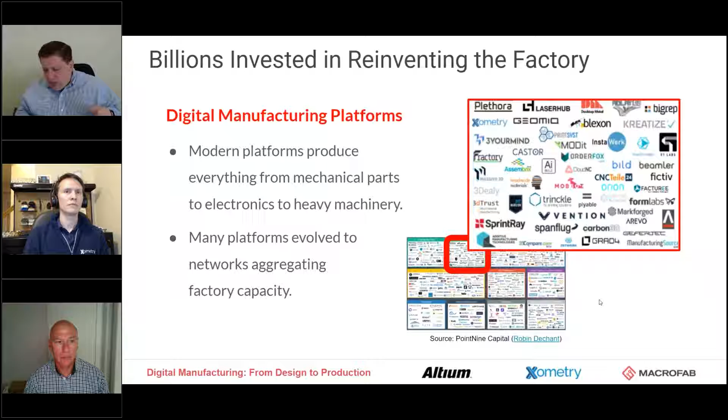So the question naturally arises, what problem are we even solving? In fact, traditional manufacturing was tremendous for a number of years, especially for contract manufacturing. It really grew up in the 90s, right as the internet was starting to scale up. Contract manufacturing was all the rage.

Believe it or not, only a third of all electronics manufacturing is still done through outside companies. There's a lot of businesses still that own a lot of their own manufacturing facilities. But for the most part, the cloud model and ability to do agile and iterative development really passed up a lot of the traditional manufacturing environments in this space.

So what we see is a lot of waterfall development, slow design iteration. It takes months or years to launch a product. Electronics design to product cycles could be 2 years. In the automotive world, it could be 4 years. The shortest we've seen is about 1 year, but it takes a lot of agility to get that done.

For years, supply chain has been optimizing purely for cost. So we're seeing crazy situations now where it's so perfectly competitive, almost anti-competitive, that there's 2 factories producing a component, and if one of them has a fire, there's a global shortage. This is affecting every aspect of supply chain. It's not just COVID, there's a lot of reasons why supply chain is brittle now.

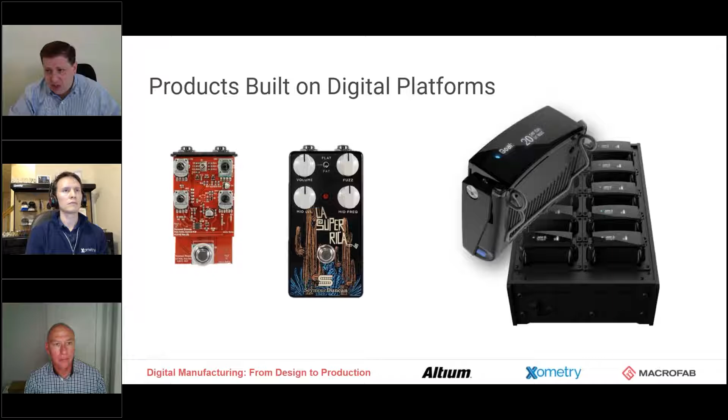One of the most common questions we get from people is when we talk about digital platforms, what kind of scale are we talking about? Because the service where you just upload a design and get some number of mechanical parts produced or some number of PCBs produced, fully assembled, turnkey, that's been around for a while, but we're seeing digital platforms go well beyond that.

Obviously, the craziest example I gave you is being able to buy heavy machinery. But in an electronics world, we are seeing customers move sometimes their entire production environment onto a digital platform. Sometimes it's a portion of it, and that's one of the ways they introduce resiliency into the picture. They might be spending $15-20 million on manufacturing a year, and they'll move $5 million to a digital manufacturing platform.

So we're seeing customers use this from volumes anywhere from low volume prototypes up to 10 units, to low volume production, this is where we see a lot of EVT and DVT builds, and ultimately go to production where we're producing thousands of units, hundreds of thousands of units. So this is an evolving use case for digital platforms.

It does not displace the well-known names in the market out there. So if you work with Sanmina, Flex, Jabil, especially Foxconn, the electronics manufacturing market is over $500 billion. Foxconn is like 1/5 of that by themselves. So there's not a situation where Apple's going to use digital platforms to go build iPhones. They're going to be built by Wistron and Foxconn and Pegatron.

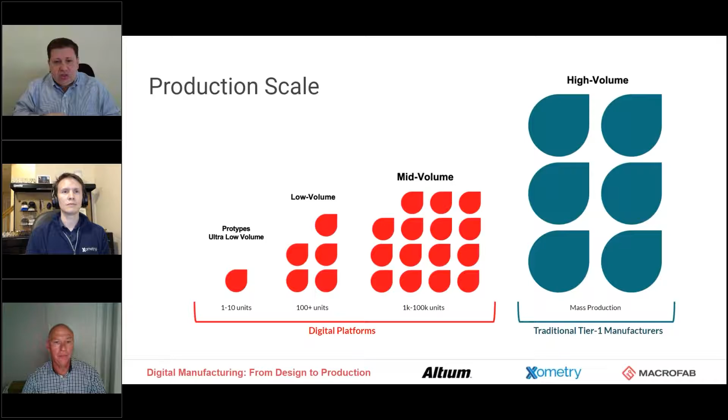At this point, I want to hand it over to Ted because we wanted to take you through the entire production process, all the way from the design stage to production. And that starts with design software.

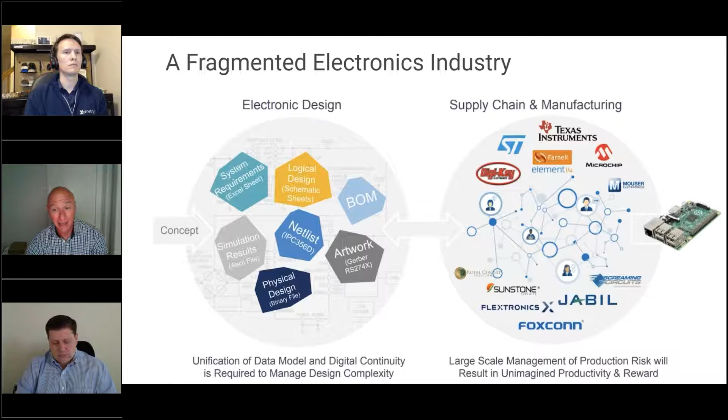In many ways, I think a big part of what needs to be done is that we establish what I would call digital continuity, so that instead of very isolated activities where people communicate with each other, like Misha said, through phone calls and emails and meetings, that they can do that in a more digitally connected process.

If I look at that through a slightly different domain, I think of it in this way: there are three very fundamental pillars for the creation of electronics-based products. Electronics-based products today are almost everything you could imagine - there's PCBs that exist in everything from your refrigerators and thermostats to cars, televisions, iPhones. It's literally everywhere. So it's a massive industry that we estimate at 2 trillion. A lot of that is in manufacturing, but from our perspective, these three pillars are literally disconnected from each other in ways that force us to throw things over the wall from one to the other.

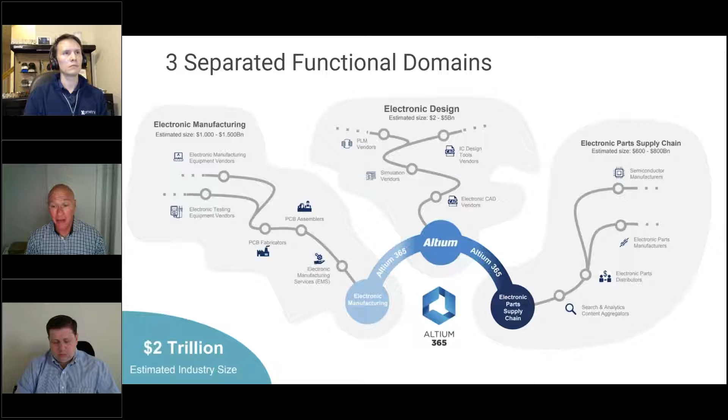One of the ideas this group has been talking about a lot is, instead of designing for, that we begin designing with. That means bringing supply chain and the component manufacturers and distributors, the people designing boards and the people who will produce those boards, together on a single digital thread so they can communicate more effectively, more in real time, with the context they need to understand what was meant, what was intended with the design, and why they might be able to make some changes, or why not. But to do that in a timely way, so that instead of going through many iterations from design to manufacture, we can solve some of those problems while we're designing. So we see it a little bit in that way.

If I zoom in just to - Altium is obviously a company that makes CAD tools for electronics fundamentally, so the design realm is the one we are most familiar with and have the most expertise in. Even that requires a very disconnected set of tools. Every time we create a printed circuit board, somebody, usually a double E, is actually designing the circuit that's going to do that. He's responsible to make sure we're creating an electronics-based product that works. Typically there are many tools people can use, our own included, but there's plenty of others.

It's a crowded space. In addition, those schematics almost always are simulated for performance, and you can see just from the list of things here, there's tons of those solutions too. Even schematic and circuit simulation aren't always connected together in ways that make it easy to move from one to the next. But now you link in layout, and that's looking at creating a physical product from that schematic design, how the circuit's going to fit onto a board. Then at the board level, there's simulation as well, typically with high speed and high density boards where signal integrity is really important. But even in simpler boards, power integrity is an incredibly important thing to evaluate during layout - that's not something you want to wait until after it's manufactured to find out something doesn't work as expected.

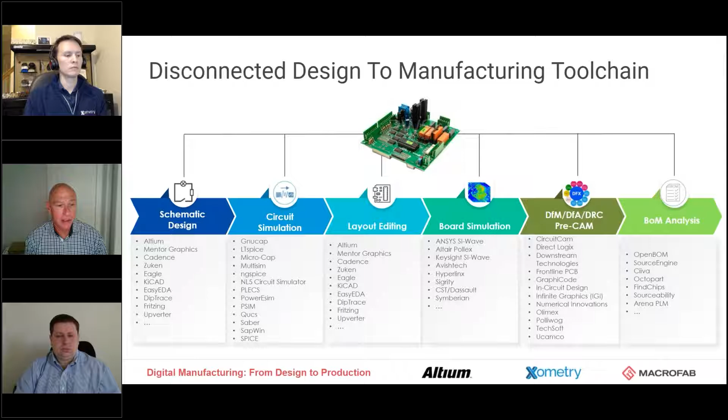So all of these are fundamentally disconnected things where, at best, we throw things over the wall from one domain or one tool in the chain to another. Many times it requires that we export things in some intermediate file format and then import it into something else. And that is a huge waste of time — a lot of the design context is lost, there's a lot of rework to be done. It just doesn't work really well.

So, if you don't mind advancing to the next one — our view on this is, and the reason why we talk about cloud technology is that cloud technology is fundamentally the backplane for collaboration. That's the way that I see it and our team sees it. So we think it's an incredibly important topic in this area of digital manufacturing, digital design, and digital supply chain to connect these things together.

And our attempt at that is to create a single information model, a data model that represents all things in a printed circuit board — that's kind of the base layer. But then exposing that information model in the cloud to partners who can connect their solutions — partners and competitors, for that matter — so that it can be presented to our customer community who work with design tools, but have a seamless connection into electronic supply chain data, or to software tools like simulation tools, MCAD or PLM, and directly to the new breed of digital manufacturers coming on board, like Macrofab and Xometry.

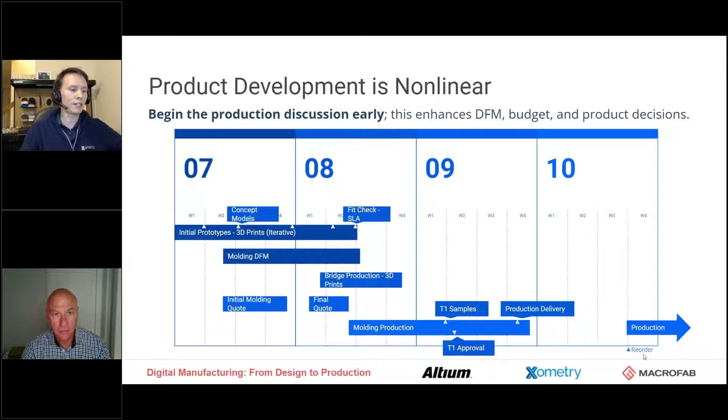If we go to the next slide, very similar to what you see in PCB hardware development, it's a very fragmented system historically. You're usually doing a zip file with your CAD package and sending out an RFQ, hoping to hear back. And what you hear back is not consistent - you don't see the average price of stuff. You see pricing varying all over the place, and the information is not always transparent.

The communications, it's email, it's back and forth, and there's a lot of inbox diving, is what I like to call it, that you have to do.

When you are set with those suppliers, there's vulnerabilities there, especially as we see more and more disruptions. First off, you're fixed with the suppliers that only you know about, where the window could be much wider with a digital marketplace. There's capacity that exists in the best suppliers out there that you may just not have that handshake, without certain digital platforms. And that exposure to regional disruptions has just been very prominent right now. It used to be like a talking point, and now everybody's like, oh yeah, I'm having that problem right now, and this is where you find the real power of platforms.

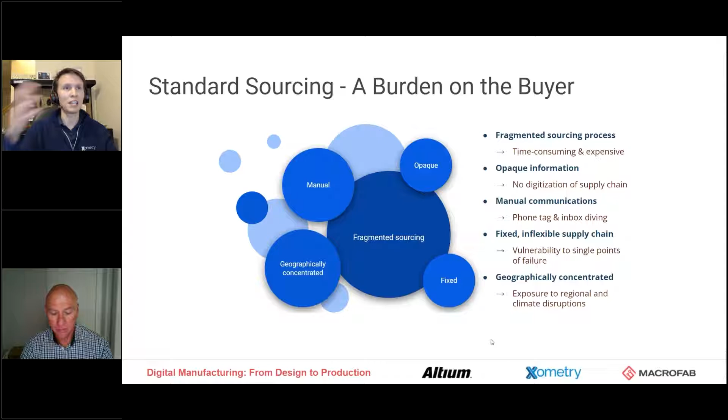So let's go to the next one, just kind of an inverse. What happens if I'm able to network together and create a marketplace for providers of manufactured goods of all different capacities and capabilities, different sweet spots, and I'm able to create a single digital platform where you, as someone who needs something made, I need an enclosure for my PCB, you can go quote and get connected automatically, just like as if you're hailing an Uber, or if you're looking for Airbnb and you're trying to get that out. There's not a dispatch there.

It is just something that magically happens in the background. A lot of times we're doing AI and machine learning on our side to get that matchmaking to be optimized. But that's the power of these manufacturing marketplaces, and that's something that Xometry is. It builds a high amount of redundancy, it mitigates that disruption, and it really enhances those capabilities.

We're not one shop that just is trying to tell you what our tool set is and design and make parts in that tool set. We are actually expressing and celebrating the differences that shops can have, and celebrating that some of these shops have sweet spots, and we're pricing to those that kind of like local shop feel by doing intelligent matchmaking using AI. If you are a larger company, if you are used to more contract manufacturing or working your supply chain, you may notice that you've aggregated thousands of suppliers along the way. Moving to digital platforms like Macrofab, like Xometry, it does actually consolidate that. It's like at one click, I get 5,000 shops, and it's just very very exciting that way.

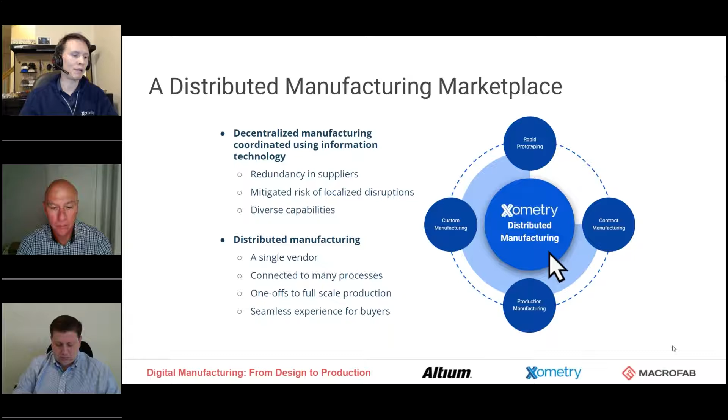But yeah, we can run to the next slide here. This one's going to be really quick, but the summary of this is it's an e-commerce experience. I'm taking a design that may have never been produced in the history of the universe, and I'm now able to not think about who am I shooting this work out to, and just upload the file, get a price, and press buy, and have guarantees against the quality of that product.

And it's a very, very different experience, and it's a very more auditable experience because everything is tracked from your file CAD to the provider, to the status updates of the provider, to the shipping information, to quality documentation, not just tied for the product itself, but tied for that instance, that lot run that the product was run in. And that's all universally chained together by using a digital platform experience.

And I do want to highlight this. We're not talking specifically about DFM and other technologies today, but by being able to celebrate diversity in manufacturing, you have a one-stop shop feel. So for example, I work in 8 different additive manufacturing technologies, 6 of which are plastics, 2 of which are metals. We also do subtractive, everything from small Swiss turned parts to standard parts, 3, 4, 5 axis, gantry parts, sheet metal components, you name it.

And again, these things could just be uploaded. Your BOM for mechanical custom goods can be uploaded, and each one will be respectively sourced with the click of a button. And of course, when we talk about PCB, PCBAs, a lot of times they're living in that realm where you may have a molded enclosure or some sort of molded component, whether that is a domestically sourced aluminum short run production tool, or it's an internationally sourced economy tool with some automated slides, or if it's a full scale multi-cavity production tool milled out of stainless steel with all the works. You can go to one single place for that type of work, and it's often very refreshing, because 8 years ago I was in the position where I was sourcing and having the same headache.

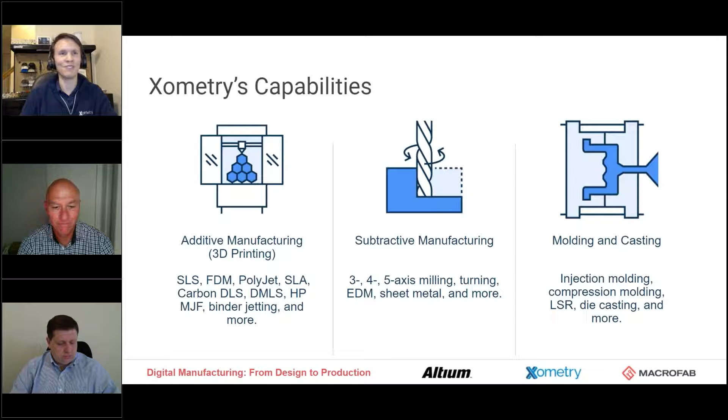So actually we've gone a very long way in the last decade here. Let's go to the next one.

One of the powers of a digital platform is you do get information, right? So we're able to train and find what is market fair. Without you searching around trying to find a fair price, we're using AI, and we're paying our suppliers because we're working both the buyer and supplying side of the world. So we actually know what something costs.

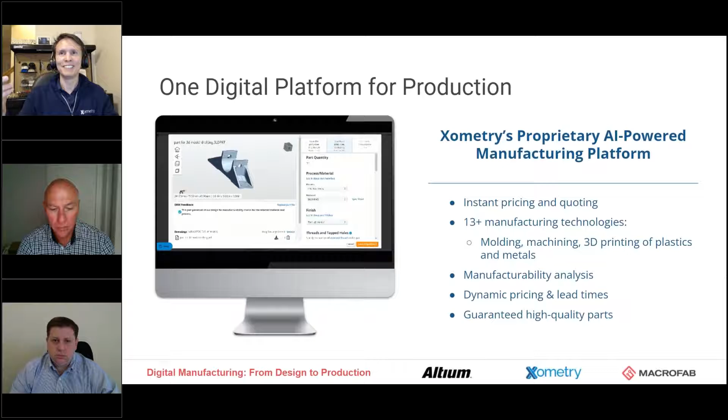You could use AI and machine learning as a platform to get more than just the sum of the components. You're able to give much more accurate pricing, much more dynamic and accurate lead times, and ultimately that also gives us information for, say, your part. If it's machined out of Delrin and has these features, we have plastic providers we think are like 98, 99% matches for that type of product, and we're trying to make that match happen. So there's a lot of power when you work with digital platforms. For you though, it may just be click and buy, very simplified. We do the work, we do the lifting on our side.

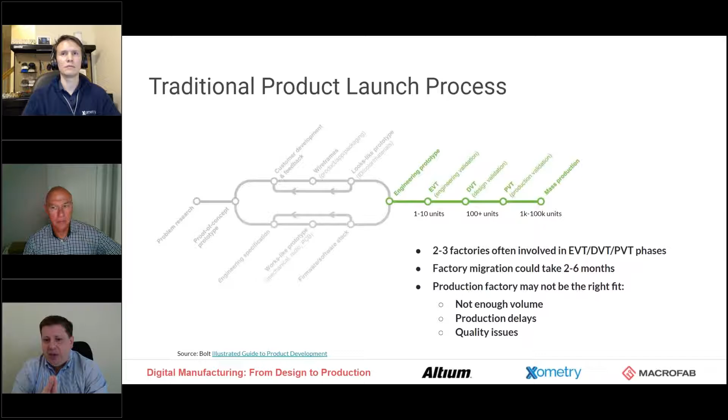The factories, in fact, fire their customers. That happens when, look, you've burned up so much of my time with your prototypes, I'm just done. We see factories doing things like that. They're saying, two years of prototypes, you haven't produced anything close to 500,000 units in volume. So customers end up getting disrupted because they're not in the right factory. That factory and customer matching is actually very important, and in the traditional process, it really doesn't work right. There's a lot of pain and frustration that comes with it.

Michelle, if you go to the next slide, it's very different the way we engage with our customers versus traditional manufacturers. Because we're a digital platform, engineers can actually order whatever they need through an interface very similar to that of Xometry, but for electronics. In fact, they can take an Altium file, upload it to our platform, upload their bill of materials.

We actually have integration with other parts of Altium already. We're an Octopart consumer, so we give customers real-time view into how much supply there is and what kind of materials are available. They can choose substitute parts immediately in the platform before they even go to production. So it starts to build out their digital package for what's eventually going to end up on a factory floor. But if they're going to go to production, we have a set of teams that actually take it to production, take it through the NPI process. These customers go through the NPI with Macrofab, and ultimately we land them in whatever factory makes the most sense for them. So it's a much better process.

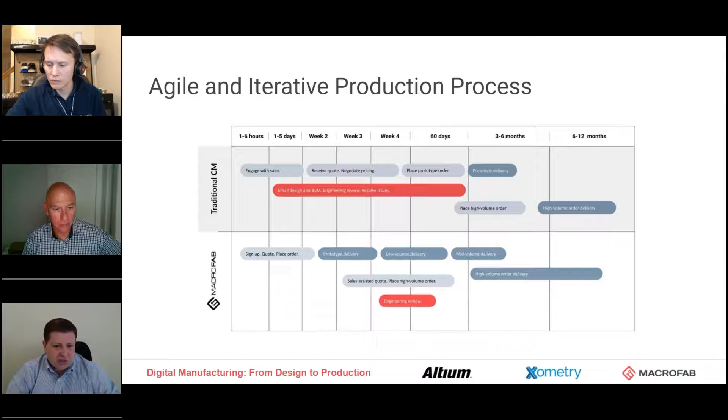Because we're using a digital process to govern everything from prototypes to production, we end up using a single platform for every stage of production. Customers can now do continuous EVT, DVT, and PVT cycles. We have customers changing products all the time. It doesn't necessarily disrupt their production cadence because they don't have to go to multiple factories and retrain them. Greg mentioned the term tribal knowledge. That doesn't have to happen in this process because we are essentially choosing the right factory for every stage of design.

Even if we end up at some point in very high volume factories, in multiple factories in parallel, that factory portability and ability to have an elastic factory—because Greg and Xometry have something like 5,000 machine shops, 3D printing shops, some of them larger molding environments. The electronics world is a bit smaller than that, but higher volume. We have about 75 factories in our network right now, but that lets us build products at very high volume, starting out at very small levels in US and Canada, but move it to Mexico when the time comes to get advantage of low cost manufacturing.

Amisha, I was going to add to that too. These digital marketplaces have also opened up a new way of thinking about production, and I know we were chatting about this earlier, which is how I think about lot sizes. And also, Ted mentioned how I think about revisions. Because whenever you move to production manufacturing, building a line or building a tool, all of a sudden it's very rev sensitive. With these digital marketplaces, because you're doing the matching for them, we tend to see more iterations where the production part is less rev sensitive, or it's less of an impact for our customer on their wallet, if they do have a rev change or an update, or they want to move to the next model.

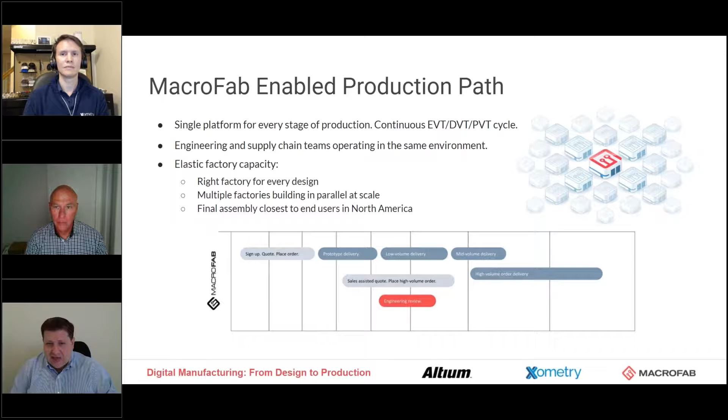And in fact, that's one of the ways that it's been very pandemic proof, is that we already have a team in Mexico, for example, so we don't have to reinvent the wheel or charter jets in all cases. We actually have people on the ground that can go to that factory and get something done.

Yeah, that's like our Asian team, the exact same benefit for sure. And you can see, you can imagine that scaling out to a very, very large scale. I used to work in data centers, and I haven't been to a data center in about 10 years. There are things you do in data centers, you go reboot stuff, you go plug in new servers. You don't do that anymore. There are hyperscale infrastructure providers that do that for you, and I think we're going to see that level of abstraction coming to this space as well.

So that's essentially how our platform works. Customers upload their designs online. We have a single platform that keeps all of the relevant information about manufacturing in one place, even as it's changing on the factory floor. Macrofab sources all the materials, including mechanical parts. In some cases, they come from Xometry. We then choose the factories and drop those production kits onto the factory floor where they get produced, and they come back. The product comes back to us for final testing.

In some cases, packaging happens at Macrofab. In some cases, that happens on the factory floor itself. But for a lot of our customers, we'll actually be the warehouse and a fulfillment arm. You can actually upload a list of customers to us, and we'll drop ship product directly to customers in a lot of cases. So we really are abstracting customers from the need to go be on a factory floor.

So it's really the vision of software-enabled manufacturing. There's a single source of truth for all your manufacturing data. I think one of the coolest things we can do is PCB versioning and change tracking, and that's different because you obviously have versions and revisions in Altium, but these are PCB versions and changes that are actually with a BOM attached to it, and changes that are done to specifics of what the manufacturing process entails. And we have customers literally going back and rewinding and figuring out what change did we actually make that went to the factory that caused this particular issue.

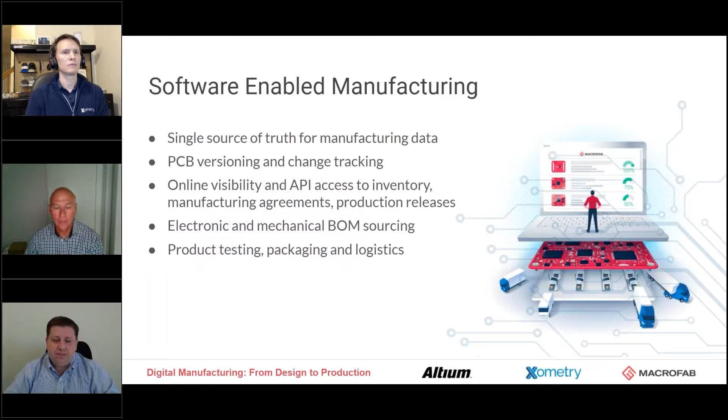So we wanted to take a couple of just very open topics and discuss. Then Michelle, would you mind going to the next slide? I'm happy to take any of the questions you guys have, but the most common questions we get on this topic are, does this really help with accelerating around supply chain disruption? And I think the other question we get is, what does it look like 3 to 5 years from now? And probably the most ubiquitous question is, what is exactly Industry 4.0? Is it anything more than a bunch of white papers and graphics?

So let's start with supply chain disruption. And Greg, I suspect our story is pretty similar in some ways, because we have a network of factories out there, so we're not necessarily beholden to any region.

Yeah, and I think one of the strongest ways I always describe marketplace manufacturing is that it utilizes capacity and talent that's there. Those spindles that aren't turning that could be turning first is one of the most powerful things, because often these providers who are perfectly capable of hitting timeliness, quality, and the specs of your project, they are out there, but the visibility, the handshake just isn't there. And that's something that digital platforms truly excel at.